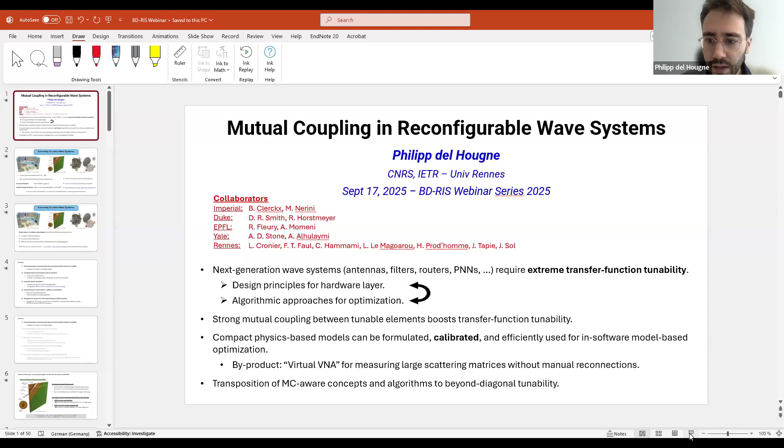All right, so hi everybody, and many thanks, Matteo, for the kind introduction and also for the invitation. Let me just see if I can share my screen. Is it already shared? No. Yes, the PowerPoint, not full screen actually, but we can see the PowerPoint. Yeah, let me just, because something looks weird, I'll just share it again. Because I couldn't see it on my computer, but I think now should be better. Now you can see it, right? Full screen. Yes. Okay, great. All right, so yeah, many thanks for the invitation.

I'm delighted to speak in this webinar series, and I chose a rather broad title to share some of our recent efforts in understanding and exploiting mutual coupling in reconfigurable wave systems. And of course, I think everyone in this webinar series is fundamentally interested in mutual coupling, because beyond diagonal tunability is fundamentally about tuning coupling. So I'll try to share some of our insights, and many of them are not only specific to RIS. That's why I picked a more general title, Reconfigurable Wave Systems. Before I start, I would like to acknowledge my collaborators who contributed to different parts of what I might mention, including, of course, our host.

Now, the starting point for our efforts in this area is the realization that the next generation of wave systems will require extreme transfer function tunability. And this applies to most microwave systems, including antennas, filters, routers, physical neural networks implemented in the wave domain, and of course, radio environments. So in order to achieve that extreme transfer function tunability, we might have to fundamentally rethink the principles by which we design reconfigurable wave systems on the hardware layer, because currently mutual coupling for the most part is either neglected or mitigated or coarsely approximated.

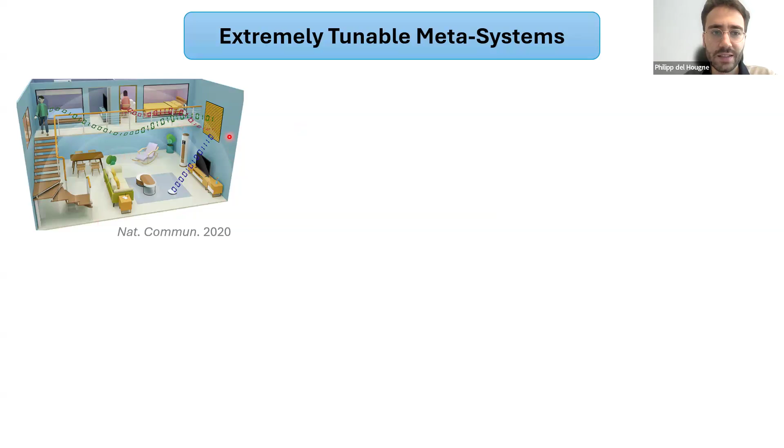So to give you an idea of what sorts of reconfigurable wave systems I'm thinking about, of course, the most prominent example are smart radio environments, and I believe everyone in the audience is familiar with the concept of RIS and how that parameterizes wireless channels.

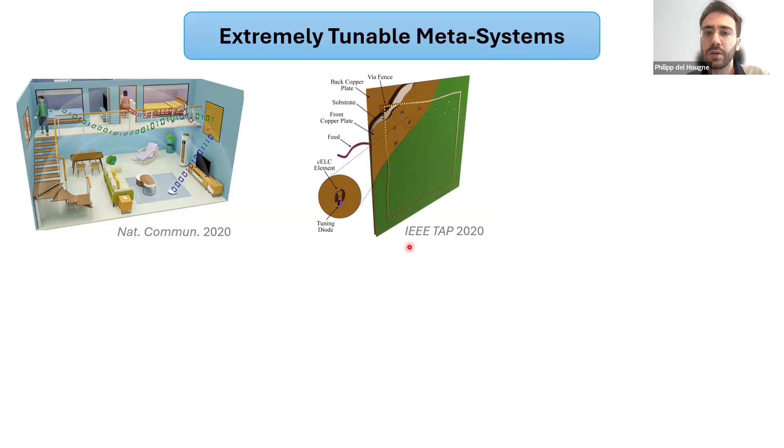Another system that we're very interested in are dynamic metasurface antennas. So this is essentially a very compact hybrid MIMO technology where you have one or a few feeds that excite, in this case, a cavity from which waves leak in a programmable manner to the far field.

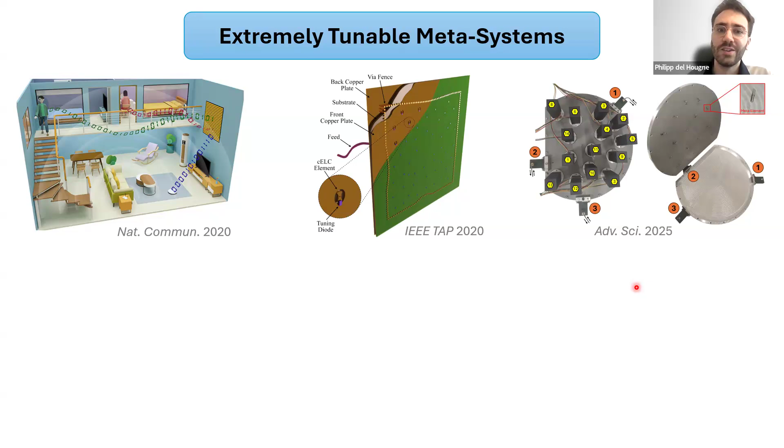And also we have some interests in reconfigurable signal processing, which could be for reconfigurable filtering, routing, or implementing analog wave-based physical neural networks. So all of these examples look quite different on the surface, but actually conceptually, they're all very closely related because in all cases, we're looking at a linear wave system whose transfer function is parameterized by a set of tunable parameters.

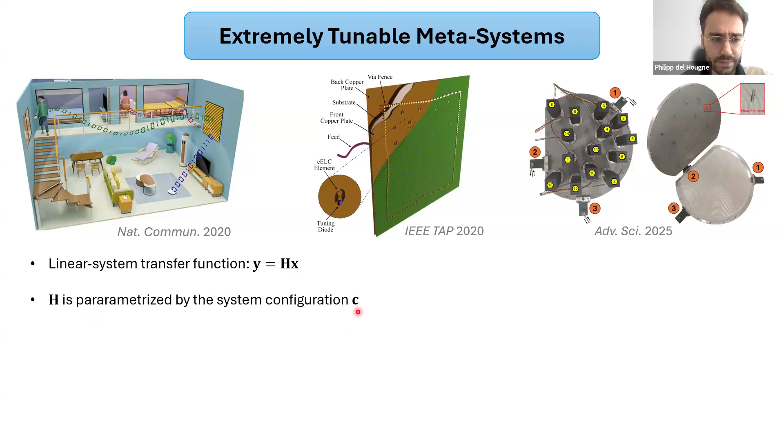So the transfer function maps the input wavefront X to the output wavefront Y via some transfer function H, and that is parameterized by our system configuration C. And so in principle, there are two sorts of problems we have to think about. The forward problem is what is the transfer function for a given configuration, and then the inverse design problem, what configuration closely approximates a desired transfer function.

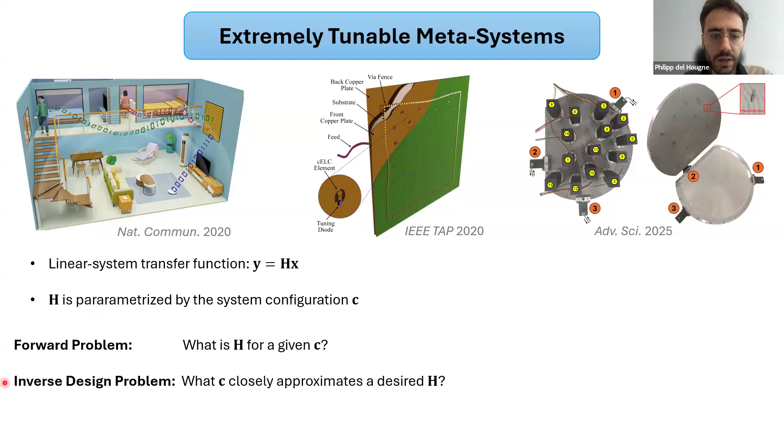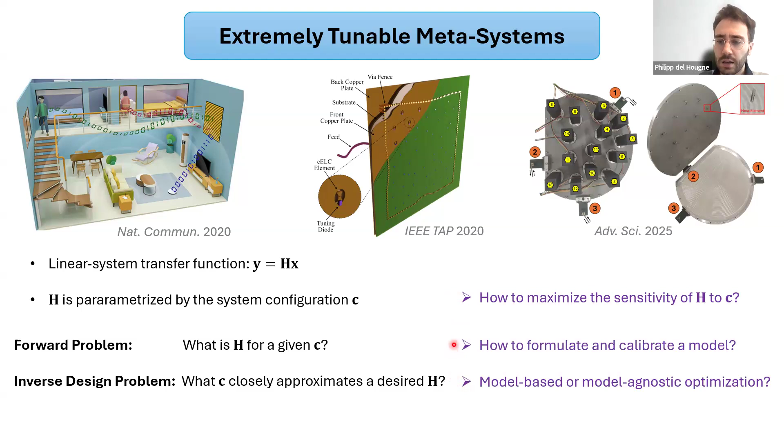And so some of the questions that we think about is, first of all, given our aim to achieve extreme transfer function tunability, how do we actually maximize the sensitivity of our transfer function to the configuration? What are the overarching design principles that enable that? And then in terms of optimization, fundamentally, do we prefer a model-based or a model-agnostic optimization? And if it's model-based, then how do we formulate and calibrate a model for a given experimental reconfigurable wave system?

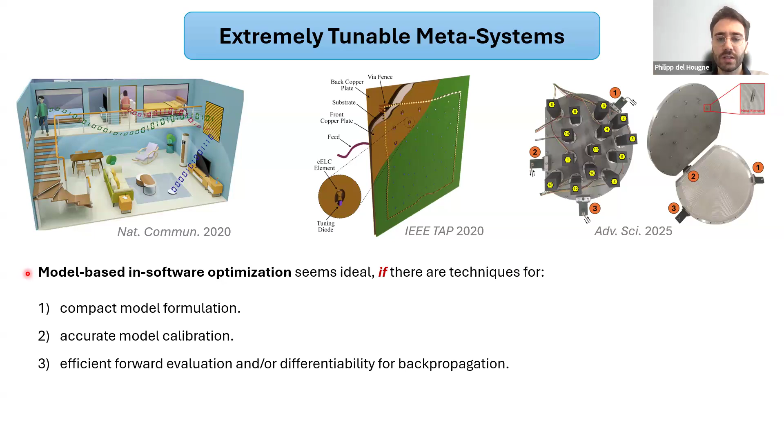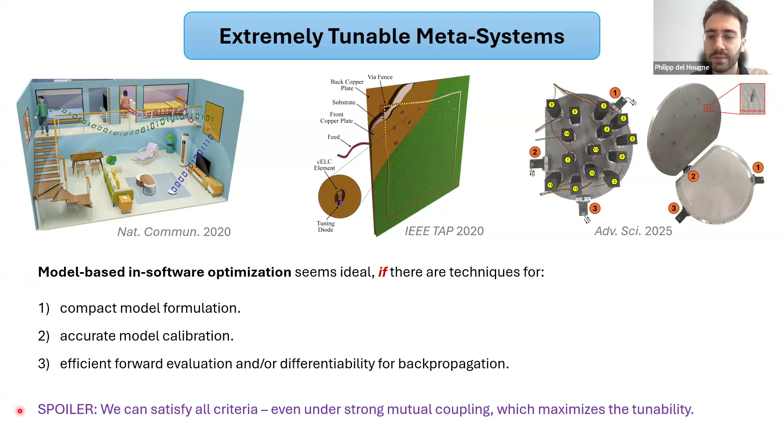So overall, we're trying to understand this trade-off between maximizing sensitivity and the difficulties that it implies in modeling and optimization. And so it is our belief that, in principle, model-based in-software optimization of an experimentally given reconfigurable wave system is ideal, provided that we know how to formulate the model, how to estimate its parameters, and how to efficiently use it for optimization. And the overarching goal of my presentation is to show you that we can actually do all three of these things, including in cases where we have very strong mutual coupling, which turn out to be the ones that maximize the transfer function tunability.

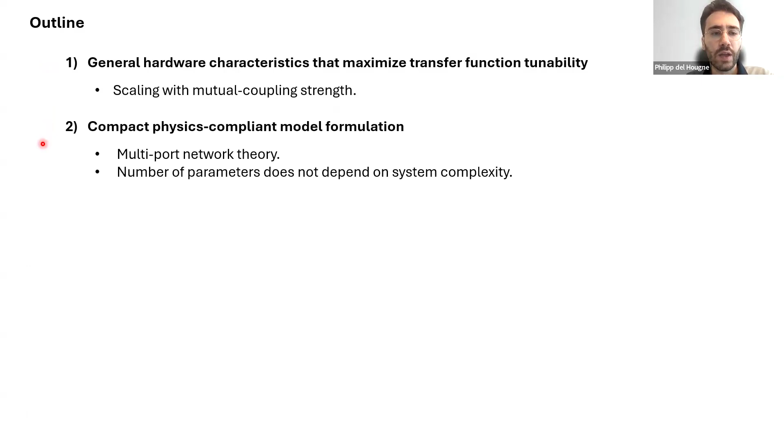So here's the outline of my talk. I'll start off by discussing some general hardware characteristics that maximize transfer function tunability. And then I'll describe how we formulate physics-compliant models, how we estimate their parameters, and here I'll have a digression to discuss ambiguities in the parameter estimation and how that relates to the virtual vector network analyzer concept. I'll say just a very few words about how we can use a calibrated model for optimization.

And finally, I'll move on to discussing how we can transpose all of the ideas that I discussed in the first 4 parts to beyond diagonal tunability. So I'll discuss a little bit what is really the difference between diagonal and beyond diagonal, and local versus non-local, and correlated versus uncorrelated tunable variables. And I'll show you our first BD-RIS prototype and also our transposition of that concept to dynamic metasurface antennas.

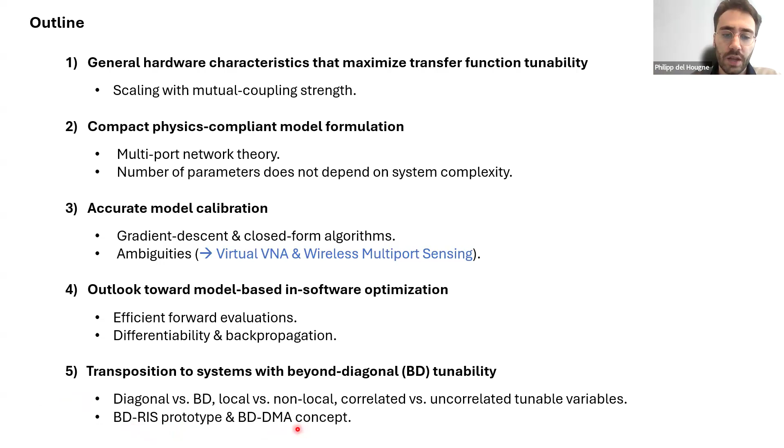But to start now, I want to think about general hardware characteristics that maximize transfer function tunability. So specifically, I want to explore the impact of the mutual coupling strength on the tunability of the transfer function. And to make that discussion concrete, I will consider a specific reconfigurable wave system, which is this dynamic metasurface antenna that I already mentioned previously.

So this is essentially a two-dimensional chaotic cavity defined by 2 parallel plate waveguides and a series of vias that is fed from the back by 1 or multiple feeds that excite the field in the cavity, and that field can leak out through these programmable meta-atoms. And so depending on which of these are switched on or off, we will sort of coherently generate a programmable wavefront. And of course, the same works in reverse also to capture coherently.

And this is a convenient system to consider because we have a numerically efficient coupled dipole model for this dynamic metasurface antenna, in which we can tune the mutual coupling strength, and also if we want we can impose a limitation to single scattering.

Now what I want to look at is how the mutual coupling strength affects the following 2 aspects. First of all, our ability to tune the radiated field, and I'll quantify this in terms of the sensitivity of the radiated field to the configuration. And secondly, how easy it is for us to predict the radiated field. And I'll quantify this in terms of how accurately a linear regression can predict the radiated field.

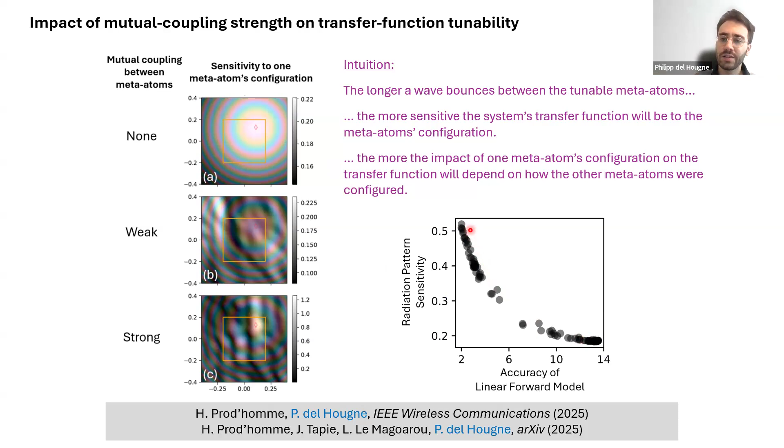As we increase the mutual coupling strength, we increase the sensitivity of the radiation pattern to the configuration, but at the same time, we reduce the accuracy of a simple linear forward model. So we also wanted to confirm this in experiments. So we've built a dynamic metasurface antenna.

Now, in experiments, it's more difficult to explore different mutual coupling strengths because we don't want to fabricate tens of prototypes. So instead, what we do is to adjust the mutual coupling strength in post-processing via time gating. So we essentially measure the radiated field across a wide frequency range. We go to the time domain, and then we truncate this time response at a certain delay time and move back to the frequency domain. And so basically this delay time at which we truncate is a proxy for the mutual coupling strength, because the paths that bounce around in the antenna for too long before exiting are essentially suppressed.

And then in our experiments, we observe the dependence of the sensitivity with our proxy for the mutual coupling strength, that is the delay time, as expected. So the longer the delay time at which we truncate, the higher is the sensitivity, and that translates directly into an ability to better control the radiated field, in this case to enhance the gain of a channel in a particular direction. At the same time, we can experimentally estimate the strength of the Hessian, so the second order derivative, and we see that that also increases, and that explains why the accuracy of a simple linear model decreases as the mutual coupling strength increases.

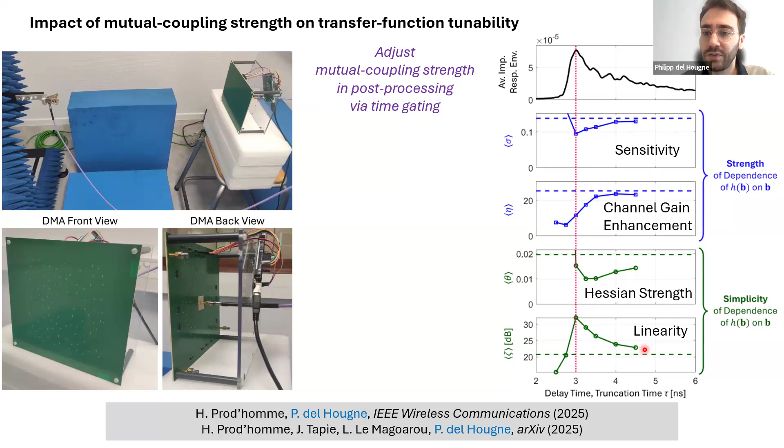So these experimental results confirm exactly the trade-offs that we've seen previously in the numerical results, which is that the more mutual coupling strength we have, the more tunability of the transfer function we have, but the harder it is to actually predict the transfer function for a given configuration. So that's what we've seen so far.

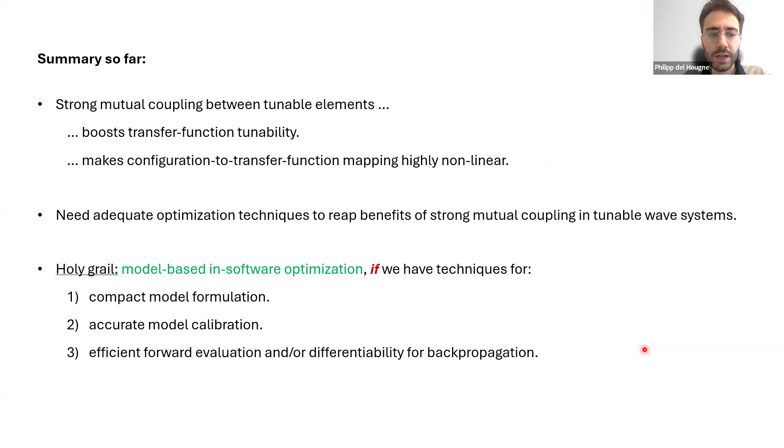And now if we want to actually start to reap the benefits of strong mutual coupling in tunable wave systems, we need adequate techniques to describe and optimize these coupling effects. And so what I want to show you now is how we can formulate a compact model, how we can calibrate that model experimentally, and how we can use it for optimization. Now, I'll move on and start by discussing the formulation of the model.

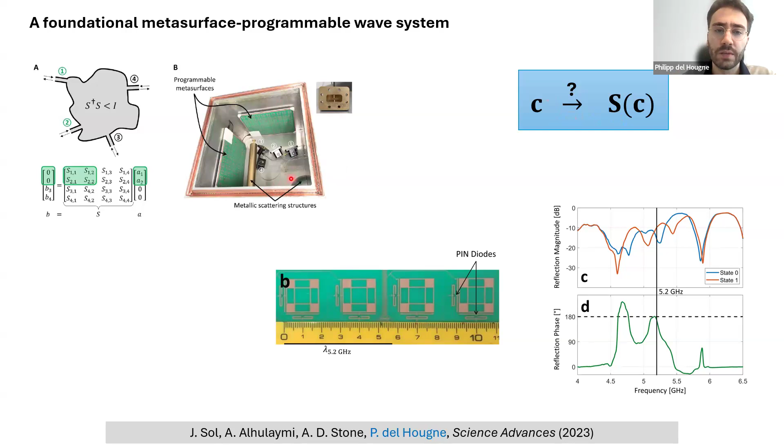And of course, that is in principle a scarily complicated mapping because of the rich scattering and because of the fact that we don't actually know the exact geometry and material composition of the radio environment.

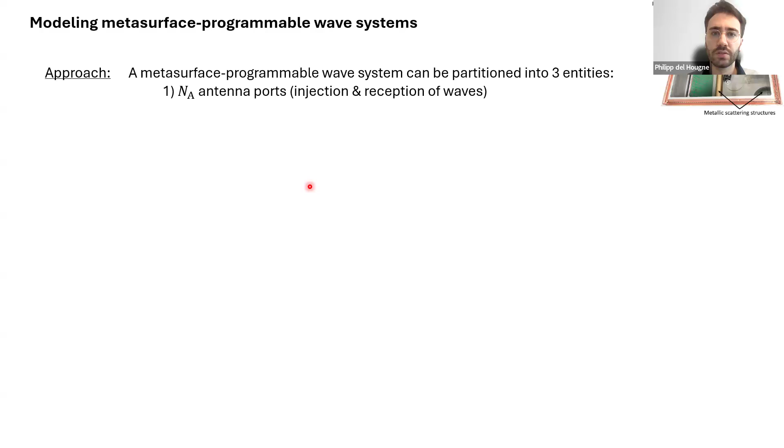Now, the generic approach for describing this consists in the following, namely to partition our reconfigurable wave system into 3 entities. The first one are the antenna ports that we use to inject and receive waves. The second one are the tunable lumped elements, in our case PIN diodes. And the third one are all the static scattering objects.

This applies to metallic or dielectric, point-like or extended scattering objects. And of course, it also includes the structural scattering of the antennas and the meta-atoms. So the metallic parts basically that are static in the antenna and the meta-atoms, they're just lumped into this background of static scattering objects. And by the way, I'll get back to this towards the end of my presentation to clarify that this also applies directly to beyond diagonal tunability, even though at first sight this might be surprising.

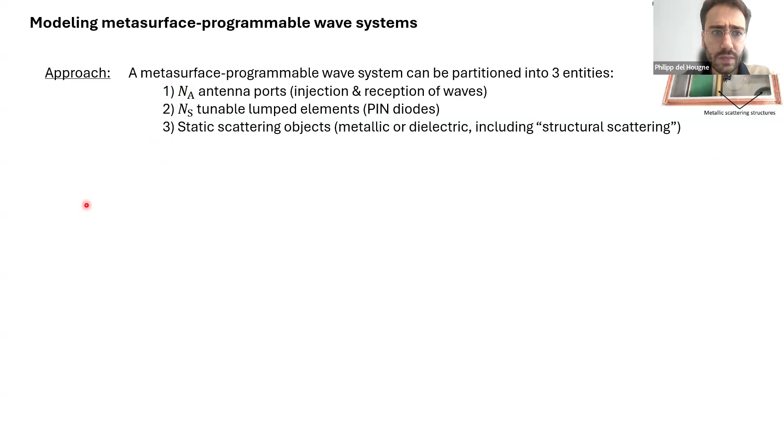Now, for now, we'll stick with the regular diagonal RIS. And what we'll do here is to interpret the tunable lumped element as a virtual port to the system terminated by a tunable load. And with that interpretation, we're right in the realm of multi-port network theory, where we think of our reconfigurable wave system as a static system with many, many ports, including the antenna ports and the virtual ports that describe the tunable components. And then the virtual ports are connected to a second multi-port system that captures the tunable loads of our programmable metasurface or RIS.

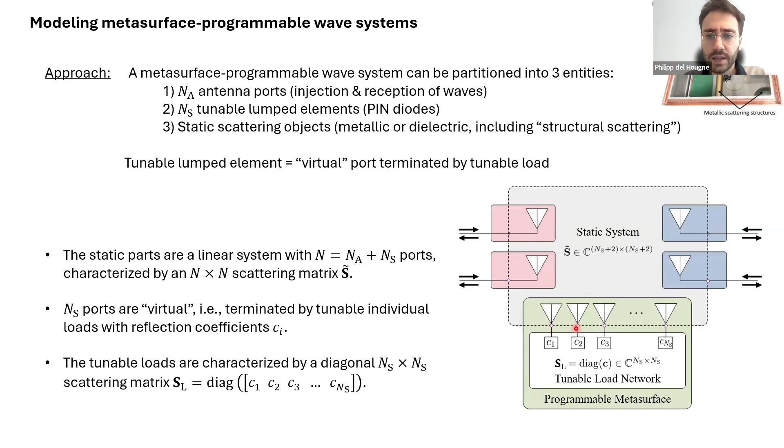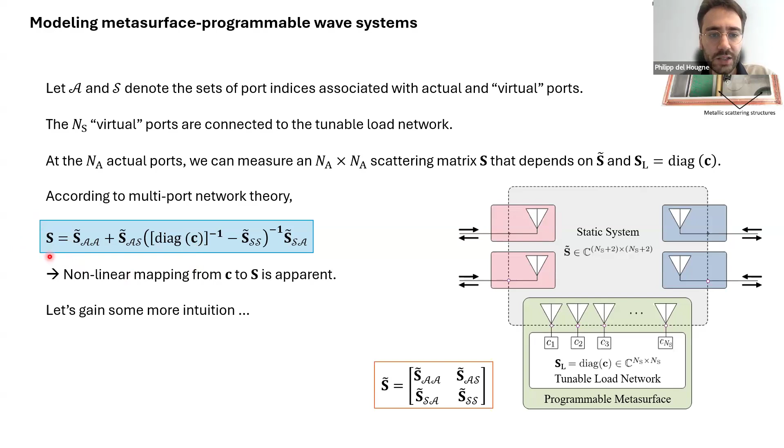And then standard multiport network theory gives us the relation between the measurable scattering matrix and this very big scattering matrix describing all the static scattering objects in our system, as well as the tunable configuration C. And immediately upon inspection of this formula, we see that the mapping from configuration to the scattering matrix is nonlinear. And we can gain more insights into this mapping by rewriting the matrix inverse as an infinite sum of matrix powers, which, by the way, is guaranteed to converge always because all the systems that we consider are passive.

And so this infinite series of powers has a very nice interpretation in terms of a multi-bounce path picture of mutual coupling, because essentially the kth term in that series regroups all the paths that encountered the RIS k times. And of course, you can then also write the series out explicitly. And many of the theoretical works in the wireless communications literature essentially use approximate models that are truncated after this first term that depends on the configuration. And so generally that truncation implies a truncation error, whose importance depends on the mutual coupling strength, as we can see from this model.

Now, just to remind you of where we're going, so far what I showed you was that generally stronger mutual coupling yields a better transfer function tunability, but it makes the mapping from configuration to transfer function more nonlinear. And we've seen that we can have very compact multiport network theory models that are fully aware of mutual coupling. And by compact, I mean that the number of parameters only depends on the number of antennas and of tunable elements, but it does not depend on the complexity of the static components. So for example, the number of parameters here is the same irrespective of whether we're in free space or in a rich scattering environment. That only influences the details of these coupling coefficients.

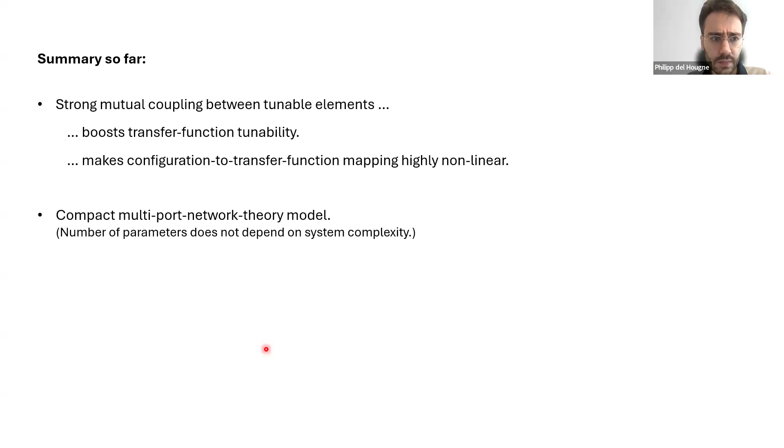Now, what we need now in order to make use of this model is to figure out how to calibrate it so that it describes a given experimental system. So that's what we'll see now. Essentially, if we want to use this model in a concrete experiment, we need two ingredients. We need this big scattering matrix that describes all the static components in our system. And we need to know the vector of reflection coefficients that describes our current configuration.

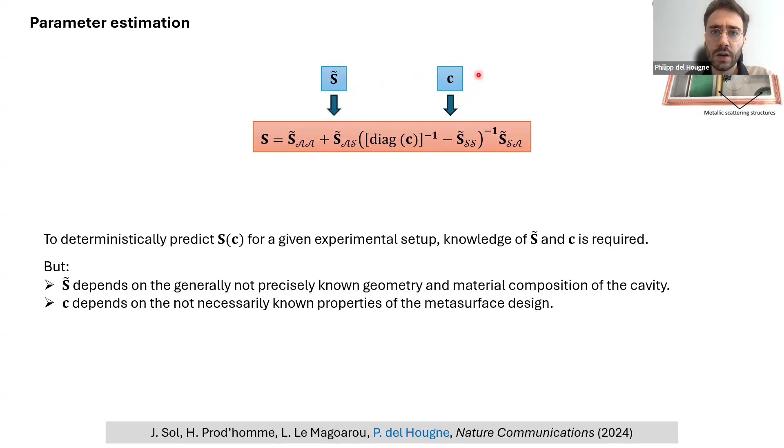Now, the difficulty is that the big scattering matrix that describes all the static components is generally not known, because if you're in a realistic environment, you do not perfectly know the geometry and the material composition. And even if you did, probably running a numerical simulation would be prohibitively costly. And also, we actually do not generally know the vector of reflection coefficients. A wireless practitioner might buy the RIS, and so the design might be proprietary and unknown, or maybe the utilized lumped components are not sufficiently documented. So generally, we do not want to assume that we know this big scattering matrix or this vector. Instead, what we know is the control vector that we choose that maps into a vector of reflection coefficients, and then we can measure the resulting measurable scattering matrix.

But we do not know the mapping from this control vector to the vector of reflection coefficients, nor do we know the scattering matrix characterizing all the static components. And so what I want to think about now is whether we can estimate a set of model parameters so that we can accurately predict the scattering matrix in our experiment for any given control vector. And I want to emphasize here again, the goal is to apply this multiport network theory model to a given and essentially unknown experimental system.

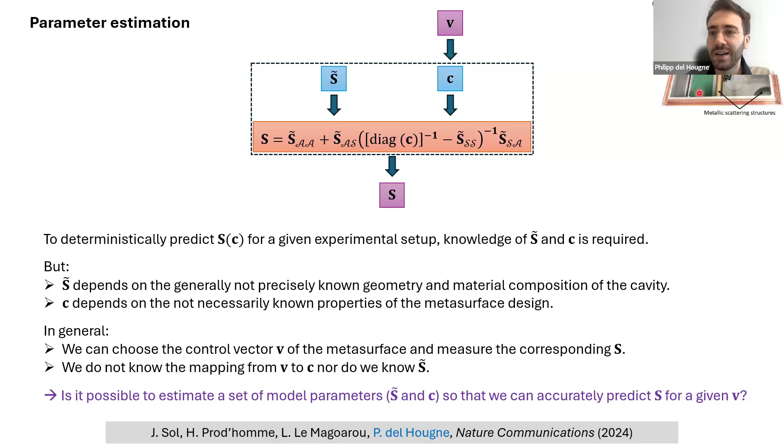Now, the easiest way to find a set of operationally useful parameters is to perform a gradient descent. So for a set of known but random configurations of the metasurface, we measure the corresponding measurable scattering matrices, and then we just perform a gradient descent to estimate a set of matching parameters. And that works fairly accurately.

So here you can see a comparison of measured and predicted scattering coefficients for unseen random RIS configurations. And it works much better than benchmarks such as a linear regression model or a deep learning model, fundamentally because these benchmarks do not benefit from the strong physical inductive bias of the multiport network theory model.

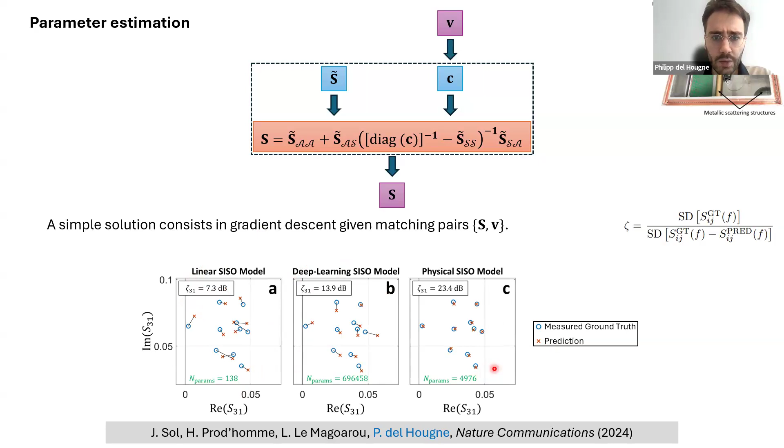And by the way, this gradient descent estimation of the parameters also works if we're constrained to non-coherent detection. And that again comes from the mathematical structure in the physical model that basically imposes that in order to correctly predict amplitudes, you must also have understood the phase relations. So here you can see comparison of ground truth and predicted scattering coefficients purely based on non-coherent detection, and you can see that the relations between scattering coefficient phases and also their dependence on the metasurface configuration are accurately captured.

And so then that enables us to perform coherent control based on a calibrated model. And by coherent control, I mean both choosing the input wavefront X and the structure of the system, here embodied by the RIS configuration C. And we've tested that experimentally for coherent focusing and coherent absorption. And our performance is actually visually not distinguishable from the one that you would have knowing the ground truth.

All right. So far, we've actually only cared about correctly predicting the measurable scattering matrix for a given control vector. And because of that, ambiguities in the model parameters didn't matter so far. We just estimated all of the model parameters together, and as long as they correctly predicted the measurable scattering parameters, we were satisfied. Now, in the following, I want to spend some time thinking about these ambiguities, understanding their fundamental structure, and how we can account for them if instead of estimating all parameters at once, we're moving towards a more segmented hybrid parameter estimation. And finally, I want to then think about whether we can sufficiently constrain the parameter estimation problem in order to lift all ambiguities.

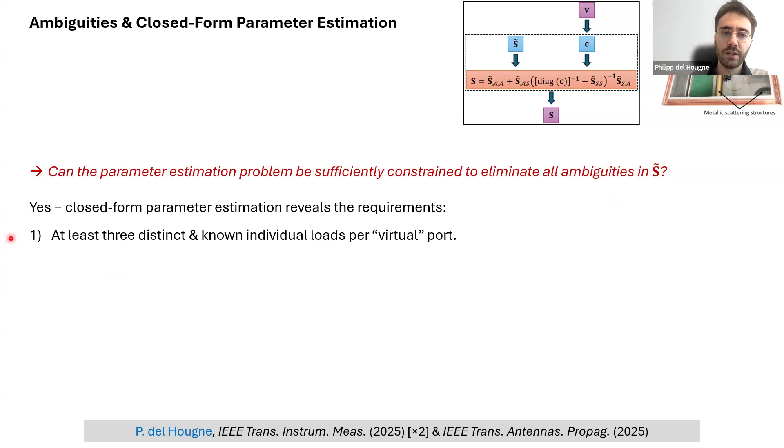And the conclusions are that we can estimate the big scattering matrix describing all the static components of our reconfigurable wave system fully and without ambiguity, provided that we can terminate the virtual ports with at least 3 distinct and known individual loads, and that we have pairwise coupled loads.

Now, you'll notice that neither of these conditions is satisfied by the typical binary RIS that I described earlier, but it's nonetheless interesting to explore these insights further because they're actually of technological relevance in the realm of instrumentation and measurement. In fact, what they reveal is that we can measure an N-port scattering matrix with an NA-port vector network analyzer, where NA can be much smaller than N, without any manual reconnections. And this is essentially what we now refer to as the virtual vector network analyzer.

And so those of you who do microwave experiments might be familiar with the fact that vector network analyzers usually have few ports, maybe 2, maybe 4, sometimes 8. But if you have a many port system, like say 10, 20 port system, and you need to measure the full 20 by 20 scattering matrix with a say 4-port VNA, then you need to do many manual reconnections, which take a lot of time and they're very error prone. And so being able to do that without any manual reconnections is potentially very enticing.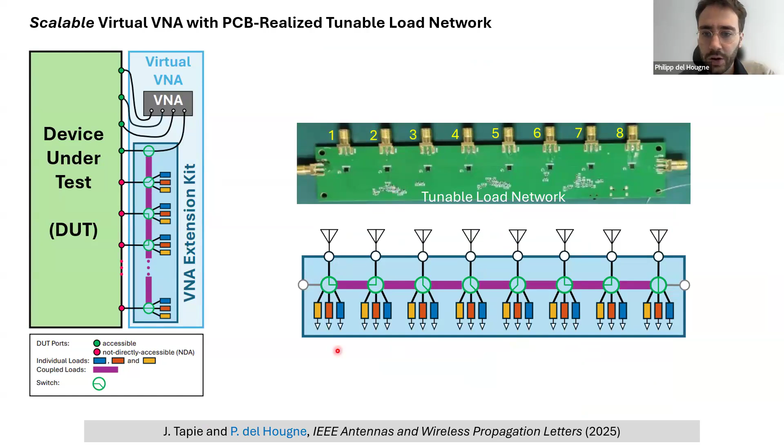And then we've thought about how we can make this approach truly scalable. So to make it scalable, basically you want something that has a small footprint and that is cheap. And so we came up with this printed circuit board that implements exactly the required characteristics of the tunable load network. And again, we tested it and it works perfectly fine.

Having established this virtual vector network analyzer technique, we can now extend it also to more complicated problems. So say now our device under test is actually remote, so we cannot connect any of its ports to our vector network analyzer. But what we can do is connect antennas to our device under test to remotely probe its scattering properties over the air.

So essentially, the over-the-air wireless channel is some sort of fixture that can be very complicated if there's scattering in the wireless channel. And then the question is, if we can have a set of antennas via which we inject and receive waves remotely, is there a way for us to unambiguously estimate the scattering properties of this device under test? Now, the answer is that based on the virtual VNA technique, this actually becomes a very simple two-step procedure.

So in the first step, we connect these antennas to a known tunable load network, exactly the one from the virtual VNA, and then we can characterize this over-the-air fixture with the established virtual VNA technique. And then in the second step, we connect these antennas to the device under test, which means that now we measure the scattering properties of the device under test via our over-the-air fixture that we have previously characterized.

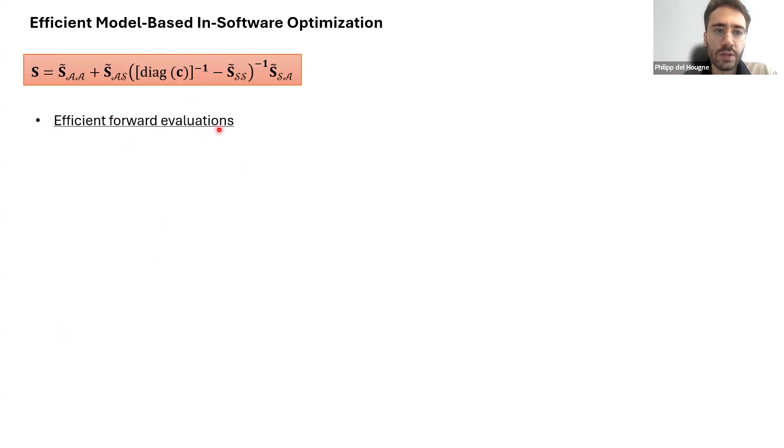Now, if the optimization procedure relies on many forward evaluations, as is the case in coordinate descent or dictionary search, then we can alleviate the cost of this matrix inversion by updating previous evaluations rather than starting from scratch every time. This is the Woodbury identity, which is quite known in linear algebra, of course. If we're more interested in gradient descent-based optimization, then that is possible because this model is differentiable and it can be integrated into all sorts of differentiable optimization schemes.

So I want to show you one example here where we used the dynamic metasurface antenna for computational imaging. And our goal was to optimize this dynamic metasurface antenna end to end so that our measurements are aware of the task that we have. So we took this physical model and integrated it into a pipeline together with a digital backend, and then we jointly optimize the physical parameters and the digital parameters.

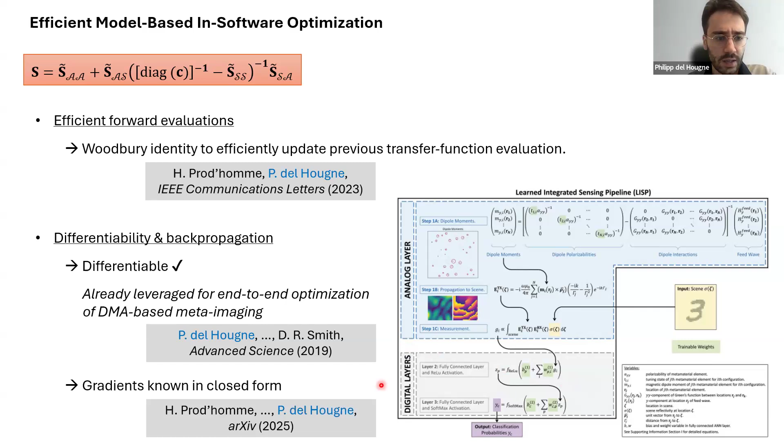What that does is that the measurement becomes task aware. And so the measurement is simultaneously an over-the-air computation of some kind. And the last thing I'll mention is that, of course, we also know the gradients in closed form.

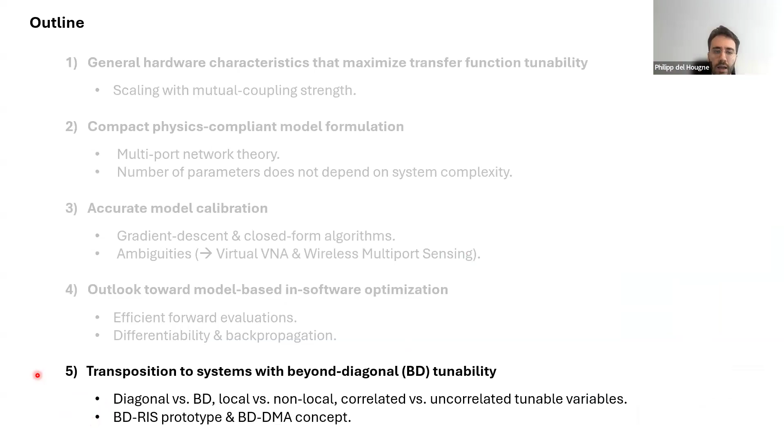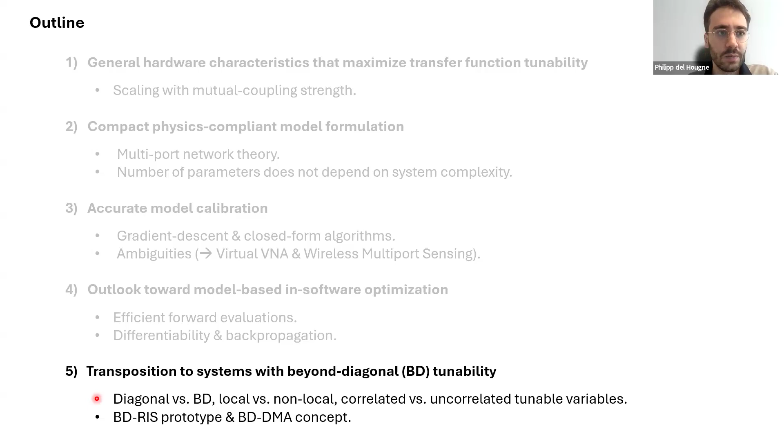And now in the remaining time, I will say a few words about how everything that I've described so far can be transposed to beyond diagonal tunability. And I want to spend some time thinking about what beyond diagonal tunability really means. I assume that the audience has some level of familiarity with the beyond diagonal tunability concept, given this is the BD-RIS seminar series. Now, what I want to discuss is to what extent the beyond diagonal programmability is fundamentally beyond diagonal, or whether there's actually a diagonal way of thinking about it.

And the key point is that the realization of a beyond diagonal load circuit, no matter the architectural details, always, in the microwave regime at least, will rely on tunable lumped elements. And so that means any such load circuit can fundamentally be partitioned into static components and tunable lumped elements.

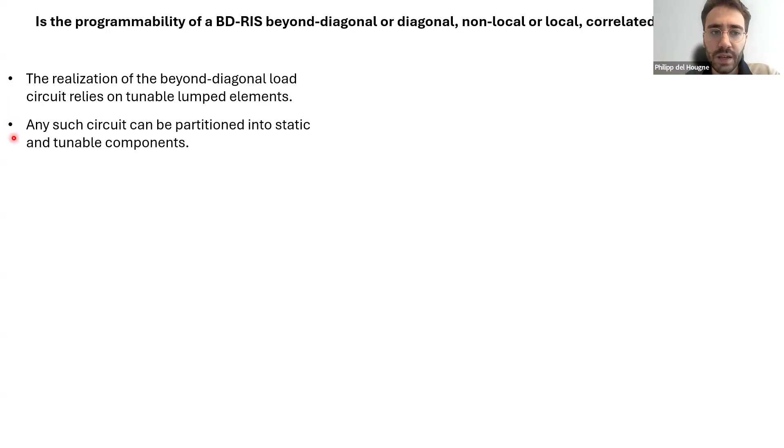And so when we're talking about a BD-RIS parameterized wireless channel, we're looking at a cascade of 3 multiport systems. So here's our radio environment, and then it's connected to our BD-RIS, which itself I've partitioned into static components, for example wires connecting loads, and the individual tunable loads corresponding to the lumped elements such as PIN diodes. And so, given this connection of 3 multiport systems, we have fundamentally 2 choices of perspective for interpreting this.

So I'll start with the conventional perspective, which consists in connecting the static components of the load circuit with the tunable ones. And then, of course, we get a beyond diagonal tunable load circuit, which I call L here, that is characterized by some scattering matrix SL, whose off-diagonal entries are tunable. And that's precisely what the beyond diagonal tunability refers to.

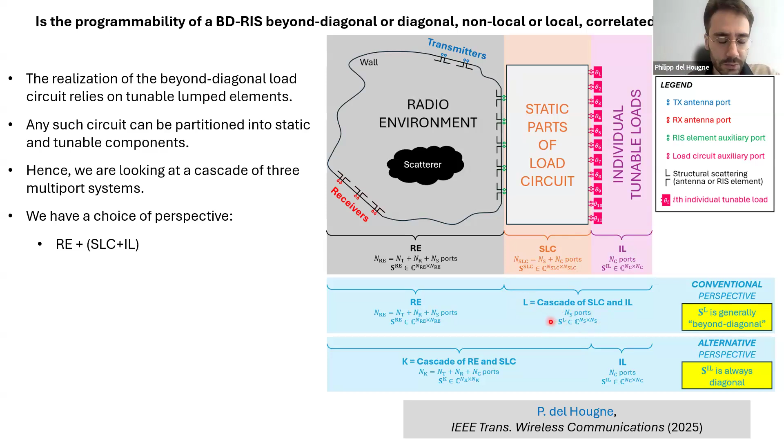What is important to notice, though, is that with this sort of very hardware-aware perspective, we realize that the tunable entries of SL are correlated. So generally, all entries of this SL are tunable, or potentially tunable, but they cannot be tuned independently.

Whereas if we take an alternative perspective by which we first connect the radio environment to the static components and then have the connection to the individual loads, then we end up with a diagonal perspective because we have some big scattering matrix describing static components that is connected to a load network whose scattering matrix is purely diagonal. And the nice thing is that in this alternative diagonal perspective, the tunable entries of SIL are all uncorrelated, and that's very convenient for optimization, of course.

And the other interesting thing is that because there is always this diagonal perspective for a beyond diagonal system, we can basically recycle algorithms that we've developed for diagonal systems as long as they were mutual coupling aware. So the first attempt in that direction was to use the multiport network theory parameter estimation technique that I described earlier and to apply it to a wireless channel parameterized by a beyond diagonal RIS.

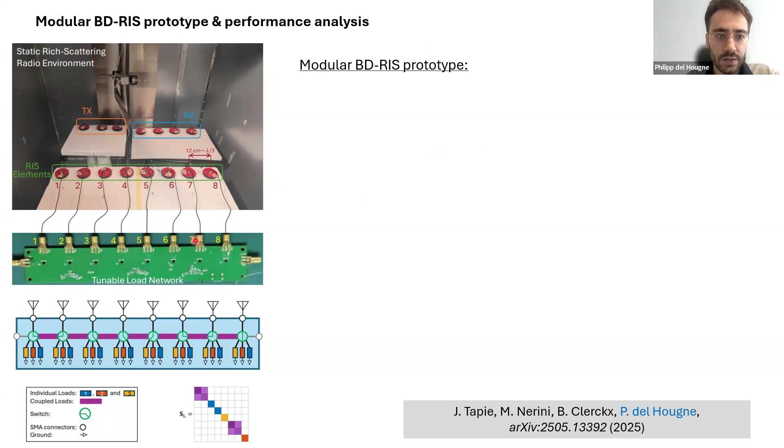And this is a modular BD-RIS prototype in the sense that, like I mentioned earlier, we're taking the interpretation of an RIS element as an antenna whose port is terminated by, in this case, literally a tunable load network. So here we have our antenna array, and the antennas are connected to this tunable load network. And of course, this is not the most compact design, but it's somewhat ideal for academic research because we can actually access the ports of the two systems that we're connecting in our system model.

At least in principle, because in practice, this is still, I think, a 15 or 16 port system, and we only have an 8-port VNA. So in practice, we actually use the virtual VNA technique to estimate the scattering matrix of all the static components. And here are just some of the scattering characteristics of the tunable load network and this rich scattering wireless channel.

Well, in the interest of time, I'll try to go quick. We've evaluated the performance of this BD-RIS experimentally, first assuming ideal hardware and then different hardware constraints that correspond more and more to the tunable load network that we have, for different performance indicators. Maybe the two key takeaways are, first of all, it seems that the benefits of having these tunable inter-element connections are fundamentally related to hardware constraints. So the less constrained the hardware is, the more we benefit from the tunable connections.

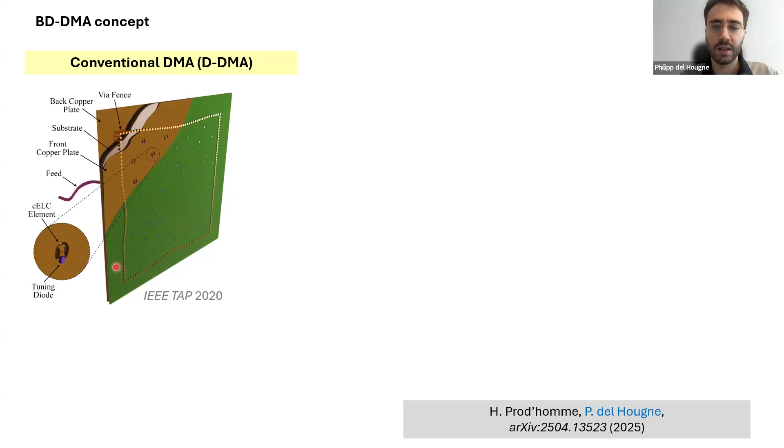Now, to have tunable intrinsic coupling between these meta-atoms, basically we just add tunable vias into that cavity. And then we can think of the beyond diagonal dynamic metasurface antenna basically like a beyond diagonal RIS combined with a feed antenna. Conceptually, that's the same if you have a base station application in mind. But of course, the beyond diagonal DMA is much more compact compared to a BD-RIS if you take into account all the volume that you need to add the feed antennas.

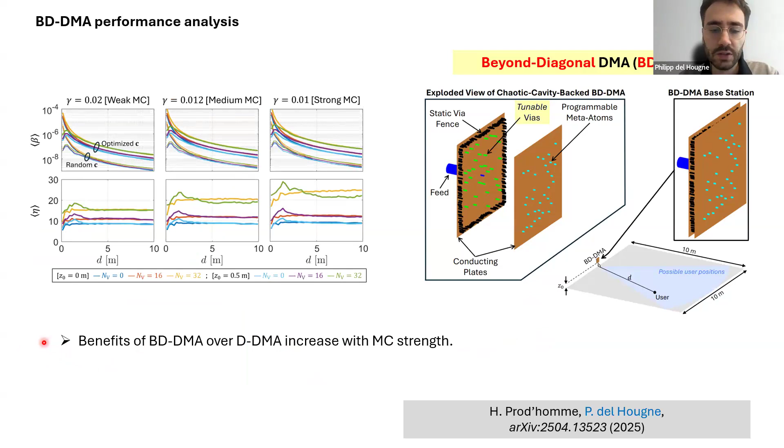And maybe I'll just mention that in terms of performance, we observe what has been observed for BD-RIS by other groups, including our host, that the benefits of the beyond diagonal tunability increase with the mutual coupling strength, and I guess this is expected. So with that, I'll wrap up.

So the key points that I hope I got across were that, first of all, strong mutual coupling boosts the transfer function tunability. And second, we can actually reap these benefits of strong mutual coupling by formulating, calibrating, and efficiently using physics-compliant models from multiport network theory. And the parameter estimation also led us to this virtual vector network analyzer concept.

And finally, actually, a lot of these ideas directly apply to beyond diagonal tunability because we can have this diagonal perspective on beyond diagonal tunability. And with that, I'm happy to take questions.